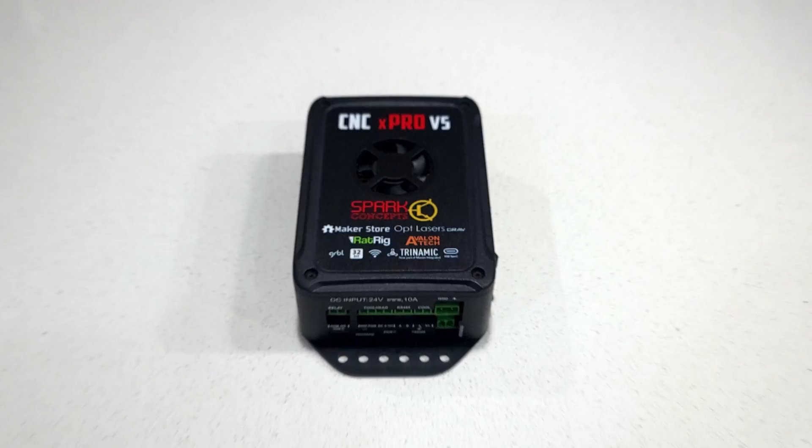I'm going to be doing the install on my Queen Bee Pro CNC from Bulkman 3D. However, these steps will work on most 3-axis CNC machines.

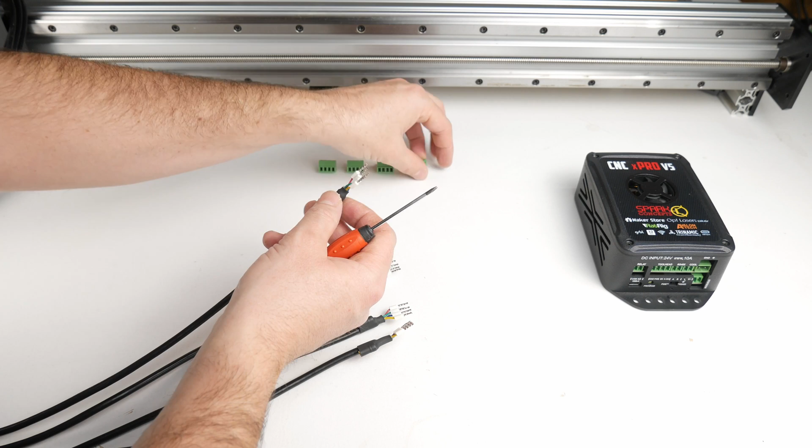Start by locating your 4-pin motor connectors and remove them from the controller. If you don't know your coil pairs, hold any two wires together and turn the stepper motor by hand. If you feel resistance, then this is a pair. Place the first pair into A positive and A negative, then the remaining pair into B positive and B negative. For me, this works out to be red and green in A positive and A negative, and blue and yellow in B positive and B negative.

As you can see here, I like to use ferrules on my connections to keep them strong and consistent. I'll place a link to the kit I use below. Pro tip here, write the axis letter on the connector so you know which is which when you're all done.

Once these are all connected and you have tested each cable, go ahead and plug the connector into the corresponding axis.

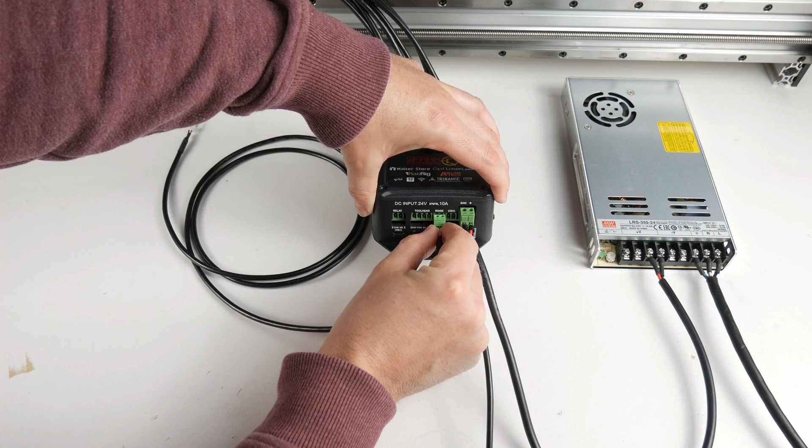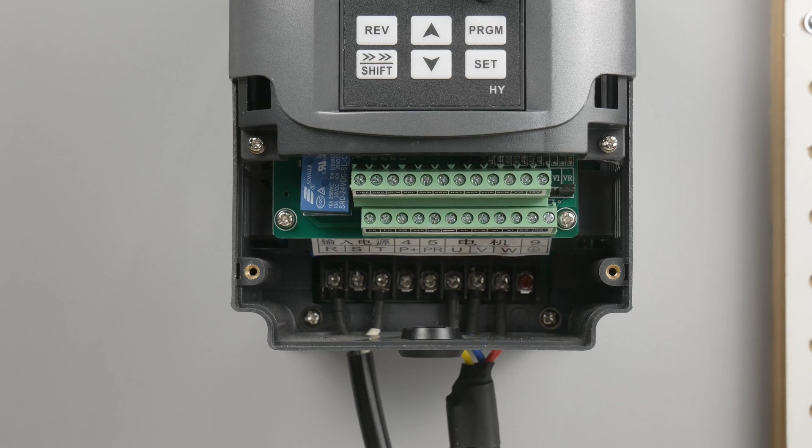Moving over to the VFD, find the RS negative and the RS positive pins, and wire the positive wire from the A pin to the RS positive pin, and the negative, which is B, to the RS negative pin.

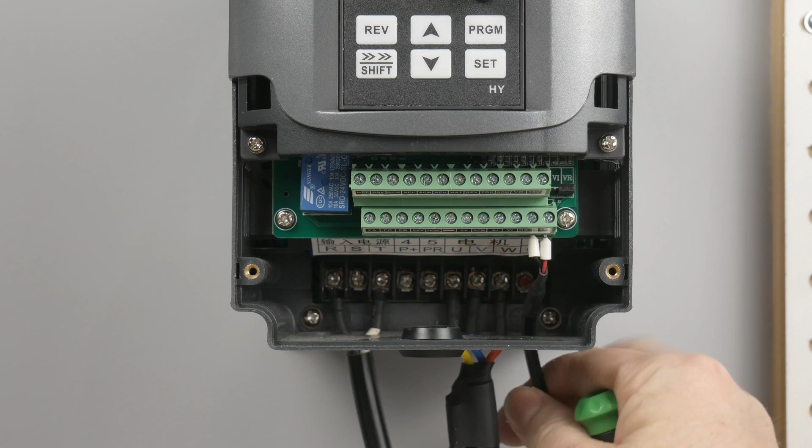You can now power up the controller, and let's get ready to configure it. The first thing we need to do on our computer is install the drivers for the controller. I have put a link in the description below.

Extract the zip file and find the install file cp210x vcp installer x64 if your computer is 64-bit, if not, use the x86 version. Run this and follow the steps. Once this is installed, you can connect the USB cable to your computer.

Now for the software. There are many different options as this is a GRBL controller. I'm going to go with the tried and tested CNC JS. Find the link in the description below, run the file and let it install.

Now start the program. It should detect the port. Mine is COM3, but yours may vary. If you don't see this, make sure that the controller is powered up and the USB cable is connected. Now click Open. Once it is connected, you will see the configuration and the status print out in the console on the left. Now that the machine is connected, we can start with setting it up.

First off, I'm going to jog my machine as I know the settings that ship with the controller are a good starting point. I will start by resetting the controller and bringing it out of lock.

Now with the distance set at 10 mm, I'll move Y in the positive direction. The machine should move away from us. Okay, the machine moved towards us, so we need to reverse this axis.

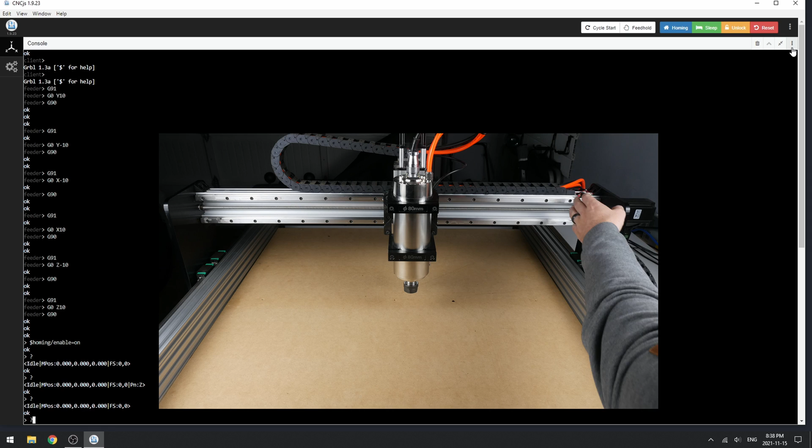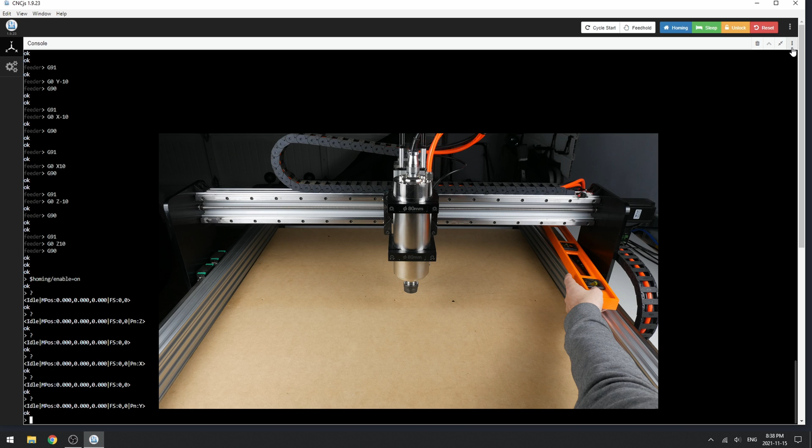Now when I press the Z and type ? again, you can see that the PN:Z is pressed. When I release and type ? again, nothing. Now let's do the same test on the X. PN:X and released. Good. And lastly, the same on the Y. PN:Y, okay, and released again, okay.

Let's minimize the console and go ahead and test our emergency stop switch before we try to home this machine. As soon as we activate it, we should get an alert. Okay, good. Reset your e-stop and come out of unlock.

Now, try and home the machine. Have your hand ready on the emergency stop. Okay, so the Z axis is fine, but our X and Y are both moving in the wrong direction. So let's use our emergency stop.

Back over to our console, however we won't expand it this time. Type $homing/ and enter. Let's check what settings are currently in place. Okay, here we can see that $homing/dir_invert is set for both X and Y. Let's remove these by typing $homing/dir_invert equals and enter.

Now reset the machine and with your hand ready on the emergency stop again, try homing. Okay, great, things are moving in the correct direction. But now you will see the axis doesn't quite get to the end stop and then it halts.

This is because we haven't configured our machine size yet. So as a safety, the machine will stop after it reaches what should be the maximum of the machine. Press home again from this location and the machine should home correctly.

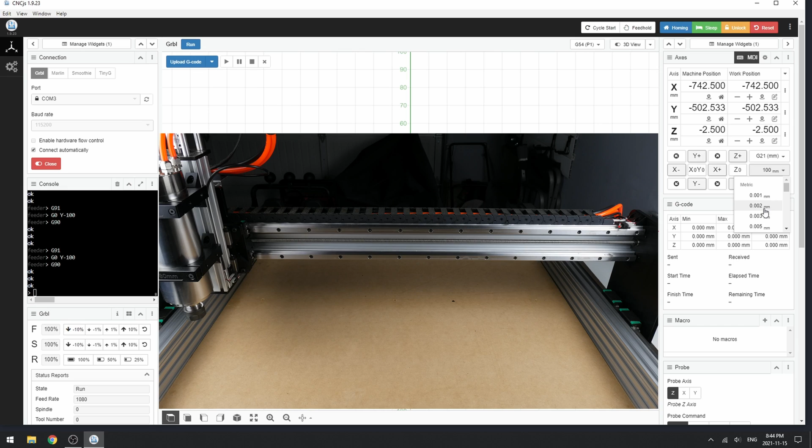And repeat the steps in the console. $y/max travel equals and the number for your machine. For me, 772 and enter. Now reset the machine and try homing again.

If you're running high current stepper motors, you can adjust the current of the stepper drivers in the xPRO. To do this, in the console, type $x/current/run equals and your calculated value. To work this out, you need to know the max current your steppers are rated for, and then multiply that by 0.707. I run my steppers at 3.5 amps, so this equates to 2.470. Repeat this command for each axis.

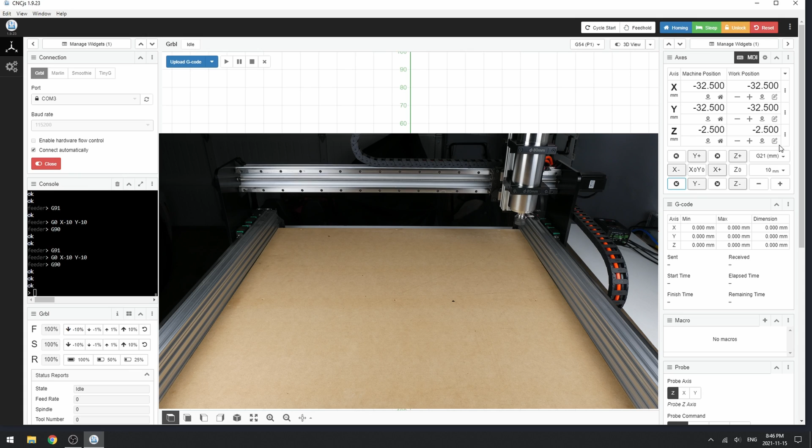Moving on, if you have a Huanyang VFD and wired it up following the steps before, we can now configure the controller to communicate with it. Start by typing in the console $spindle/type equals Huanyang, then enter. The controller will immediately start looking for a connection on the RS485 port.

Let's go ahead and power up the VFD now. Okay, good, we see the connection in the console now.

Let's set our max and min speeds for the spindle. For this, $G code/max S equals 24000, enter. And $G code/min S equals 8000.

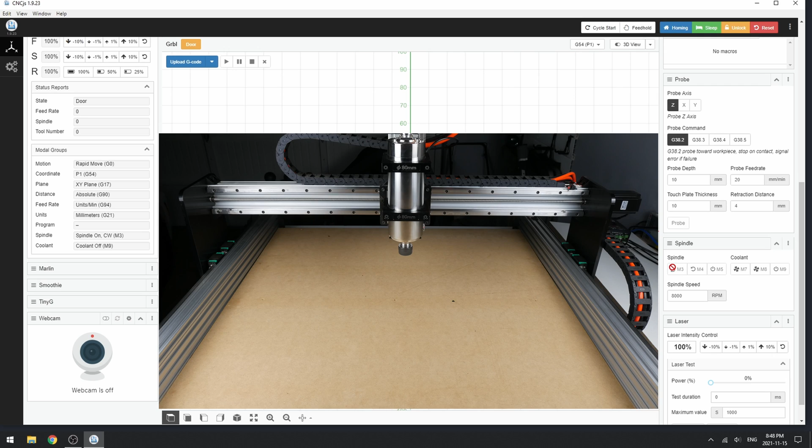Your machine is now ready to go. I always run a job in the air before testing out a new machine. This is a good way to see if there are any issues before they become big issues. So let's load up a cam clamp and run it in the air, we can set our work home and start the job.

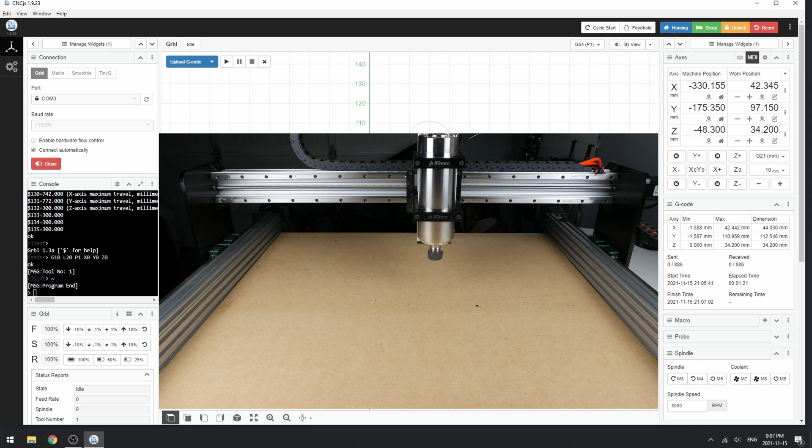Looks good to me. Stay tuned for more videos on the xPRO V5 controller.